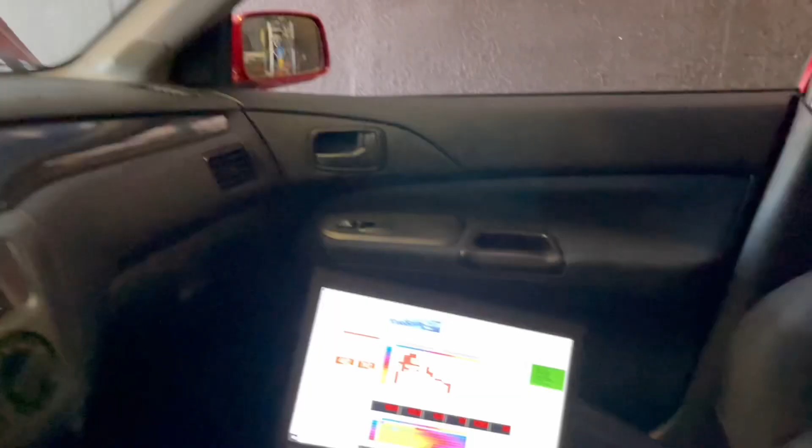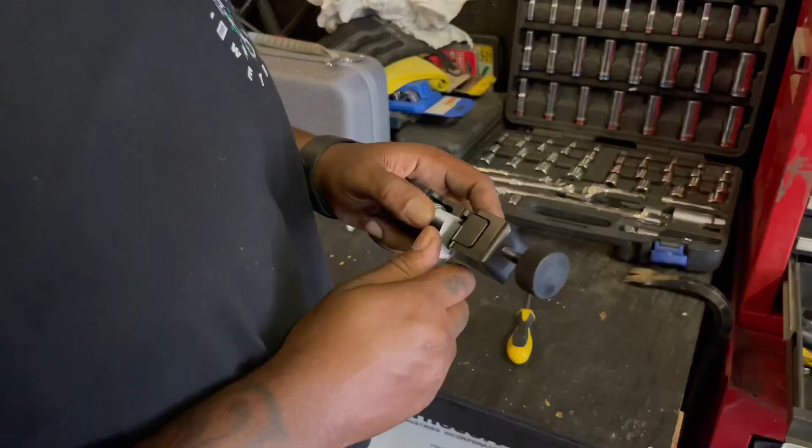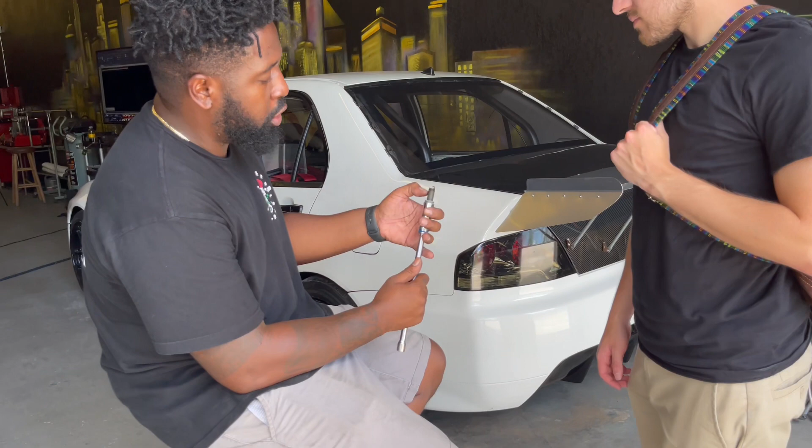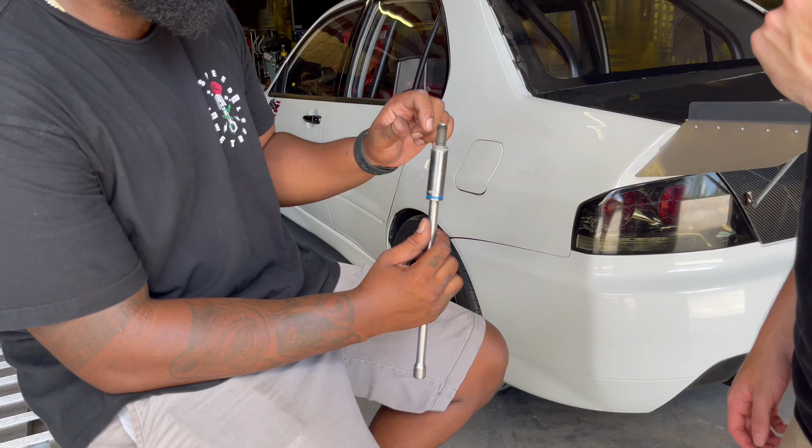Now, also, when you have the right burn, like the tune, timing, ignition, all that kind of stuff, the strap will no longer be polished. So we want to have this gray, smooth area on the strap here, because it burned off all the shininess. We want to get the tune to the point where it burns off all the shininess, so it has that dull, smooth finish. So this would tell you where you stand for tune.

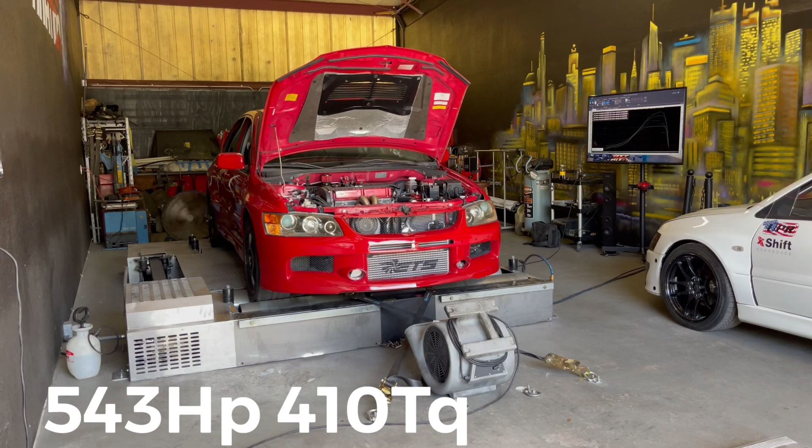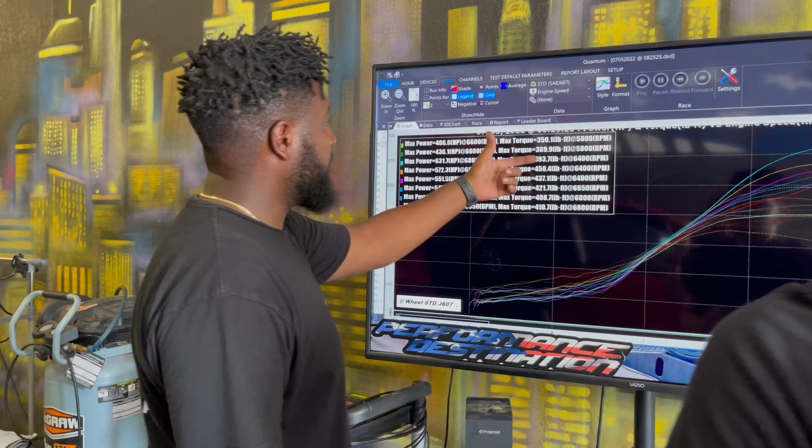Close to that. Yeah. So what I had to do is, it started off making too much power, then making too much torque. So I had to turn it down, but it wasn't dropping. I would have left it right here if the torque was more manageable. You know what I'm saying? I'm trying to keep it at 400 or below 400, but 410 is not bad.

What I had to do was offset the boost. So I lowered how the boost ramps in, how the boost comes in, and I'll bring up how the boost comes out. Like how it is right now in the graph, how it comes in, I'll just slow it down and bring it up. So every time I make a pass, that's all I was trying to do. I kept offsetting it. So it keeps going like this: torque, horsepower, torque, horsepower.

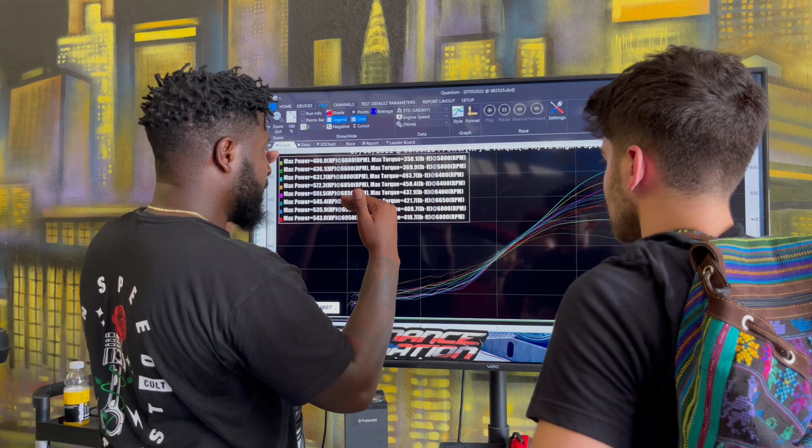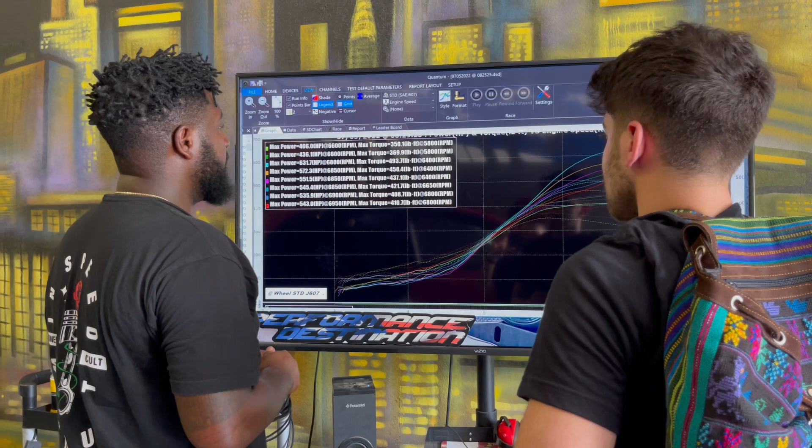But if I did it across the whole board, it would go like this. In the beginning, it was going like this. So I had to kind of offset it. Try to keep the horsepower up, try to bring the torque down. Even at 400 pound of torque, for a street car, it's still gonna feel pretty good. For you, it probably won't be dig racing. A lot of this is gonna be roll racing, light to light type of thing. So it gets into its power band at a very sweet spot.

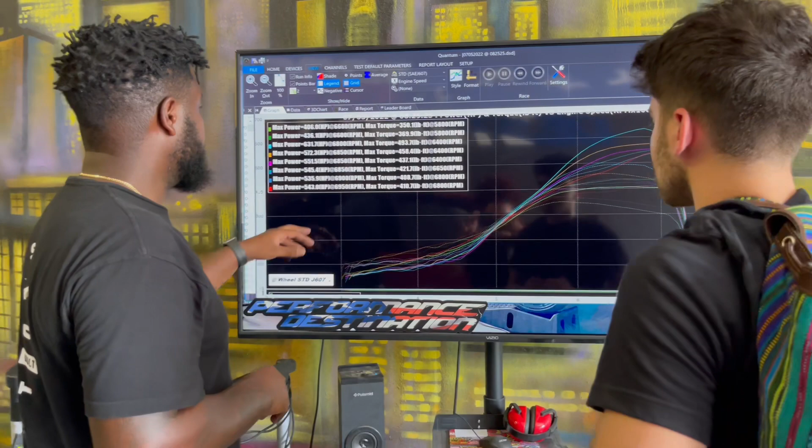So at 6,950 RPMs, it's making 543. And 6,900 RPMs making 535, and at 68 it's making 410. So the horsepower and torque is right about the same peak level. So when it comes on boost, you can hear it. I can feel the whole car go like this. The front end picks up, and I can feel the back end of the car start squatting. It's gonna take off. You know what I'm saying?

Just so you know, you said you had a 500 horsepower car before, but it's gonna hit different. Any car can make 500 peak. But when I tune a car, I try to capitalize on the power band. How much power can I make in between before it gets to the peak? So at 500, it'd be a lazy 500, but it'll still make 500 on the peak. But all this down low, you're like, man, I feel like I don't have that initial hit.

But I try to make all that up, but still try to not get too aggressive like how we were. That was way too much in the beginning. So I was like, oh shit, let me turn this down a little bit. I was trying to work it slow, but I think we got a good balance. I try to keep it where your goal was, mid 500s, and just enough where you're gonna feel it.

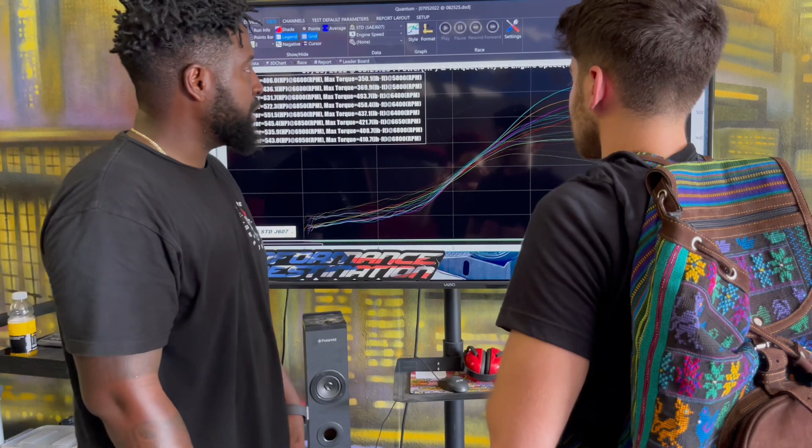And it doesn't fall off. Every pull, it doesn't fall off. As you get on it, it's gonna pull all the way to red line. Every single pass. Every time you bang gear, you get on it, pull. Bang gear, get on, pull.

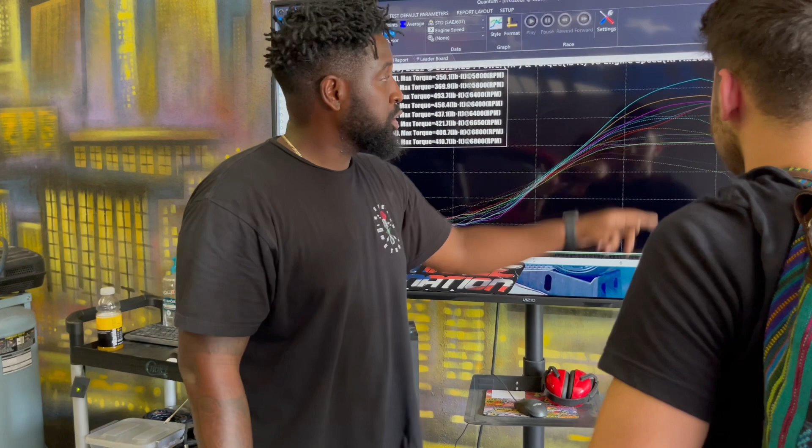Because sometimes you see a car, you see a graph go like this, and as soon as it makes its peak, it starts tapering off. So it's either a boost leak or the car is just not efficient. The turbo's not efficient, or the cams or something. But yours is gonna feel it. As soon as you get on it, it's gonna go up.

You know you didn't even floor it yet? I know. You didn't even floor it yet, bro?

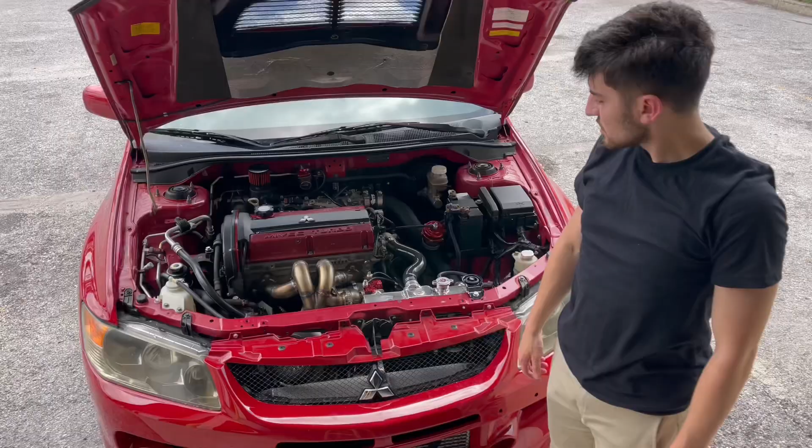All right, man. So we just finished that pull, and how did the car feel for you overall? Feels like I was traveling through time through the pulls. It drives great. It feels OEM. Yeah. Real nice. So overall, how satisfied are you today after the session? 10 out of 10.

And where are you coming from right now? Coming from NOLA. It's a 10-hour drive from here. Right. But it's worth it. And are you driving this car back or trailering it back? Driving it back. All right, man.

Are you happy? We just went for a test drive on the street. How'd that feel for you? Felt amazing. So overall, you're happy with the service, the tunes, and quality, and now you're going from Florida all the way back to Louisiana. Yes, sir.

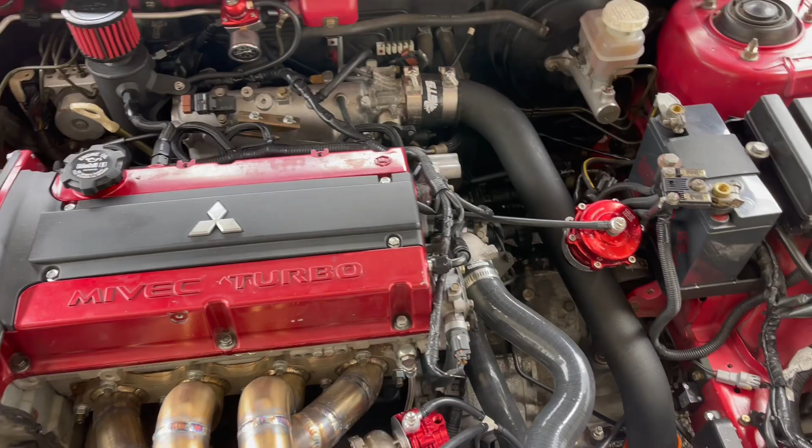All right, man. Great. I appreciate you coming all the way to Florida to hang with me. Appreciate you. Thank you very much, man. This car is beautiful. All the way down from Louisiana to Performance Destination.

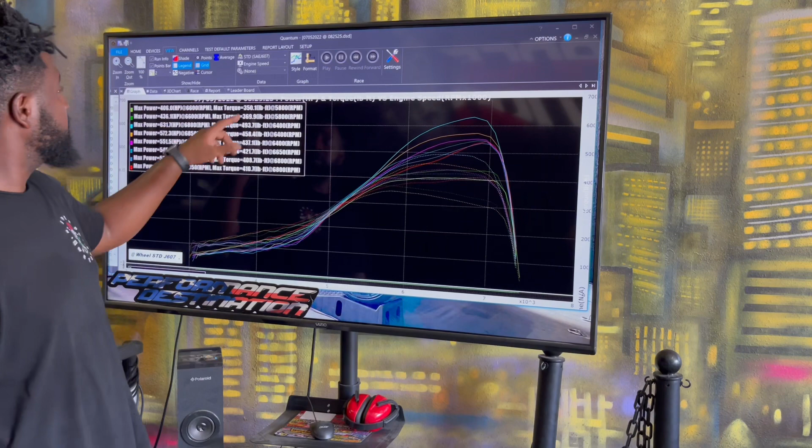This is Desmond from Performance Destination. Just got done tuning a customer's car. He had this car shipped down all the way from Louisiana for us to tune it, and it actually did very well. It's a stock block, built head, PTE 6266 on 93 and E85. On 93, he made 406, 350, basically on gate pressure, just to have something to play around with. This way it feels good, but still comfortably safe.

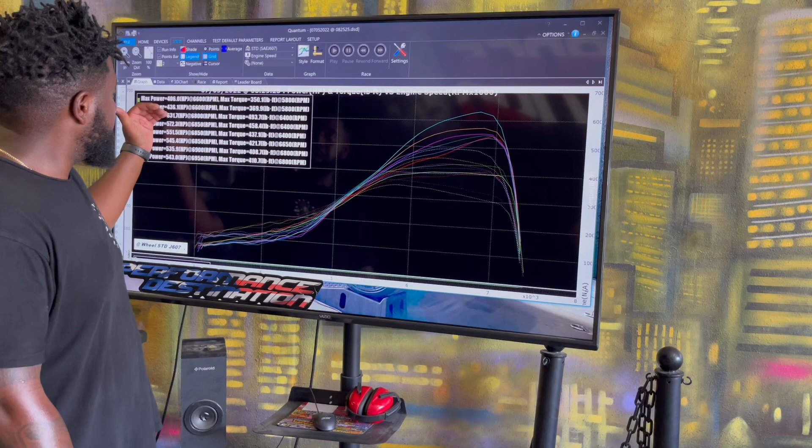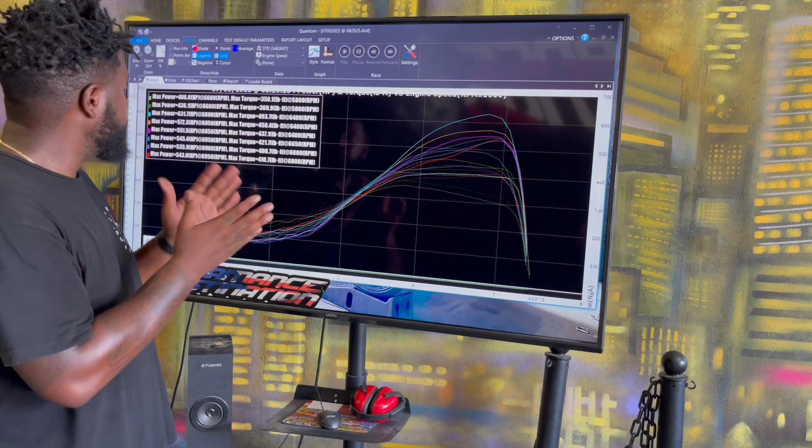And when I swapped over the map and put it on E85, it started making some power. First pull, it made too much. It went to like 631. Then I started scaling it down. His goal was to make somewhere in the mid 500s, but at the same time, we want to keep the bottom end happy and keep it safe. So as I was getting aggressive on the boost up top, I slowed the boost coming in, this way to keep the torque down.

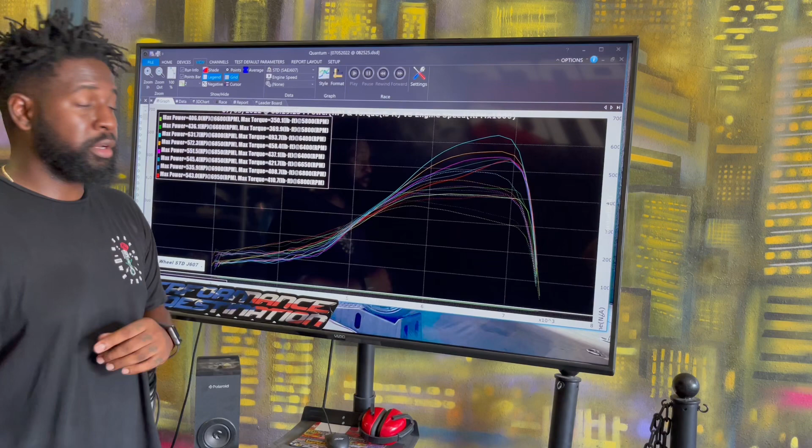I didn't want to sacrifice it enough where the car didn't feel strong on the street or healthy, but it was a phenomenal session. Customer's happy. He has almost a 12-hour trip back to Louisiana from Orlando, Florida. And we finished the session at 543 and 410 foot-pounds of torque. A good balance for where you want to be for a stock motor.

Could it make more power? Yeah, it can make more power. I could have also turned it down a little bit more, but I was trying to keep it in that margin of where he wanted to be for his goal, but still keep it safe enough so the motor will last. And that was on E85. So customer's happy, car made good power, power band is nicely shaped.

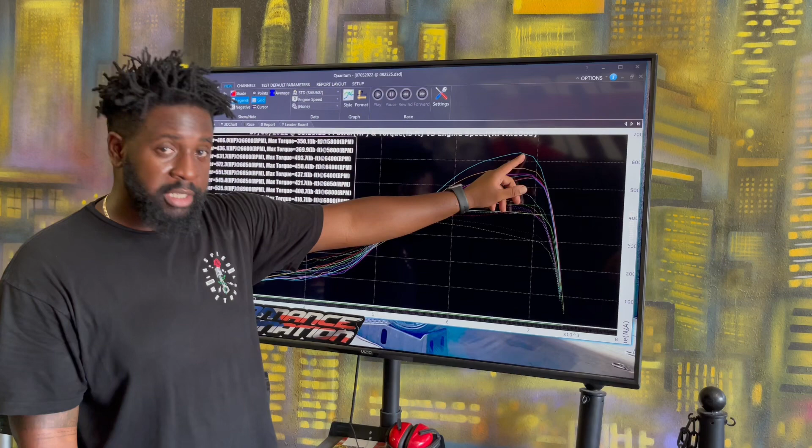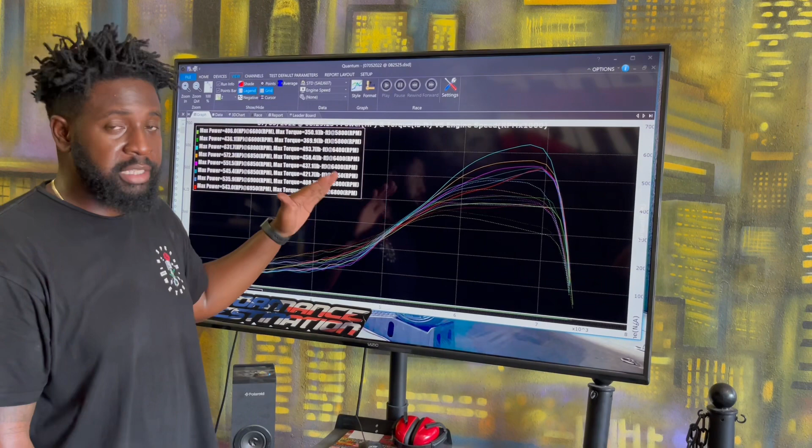I always tune for the power curve, and I always tune for the in-between power band. A lot of people can make a peak number, like 500 or 600, but then on the way up, everything in between feels really slow and sluggish. But I wanted it so when he gets on it, it's instant snap, instant pull, nicely crisp. Power band is all the way straight through.

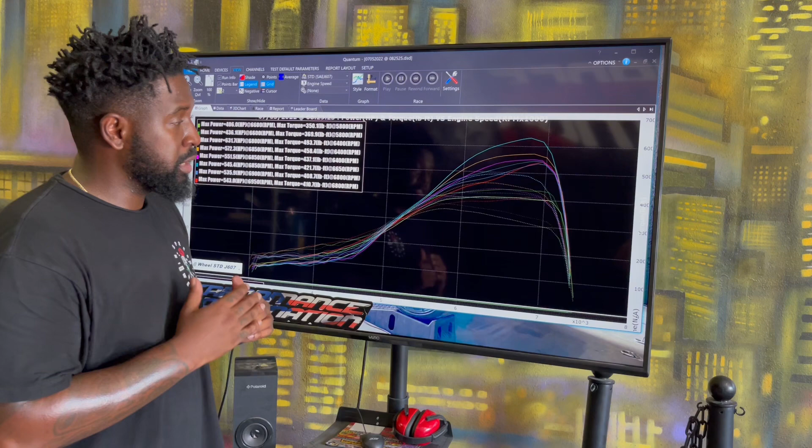It makes power all the way to redline, and I already told him if we rev this out higher, it's just gonna make more power. We only revved it to 7,500, because we're trying to keep everything happy. It doesn't need to be high revving, it doesn't need to make too much power for what he has right now. But for what he just left with, he's happy, I'm happy, his motor's happy, everybody's happy.